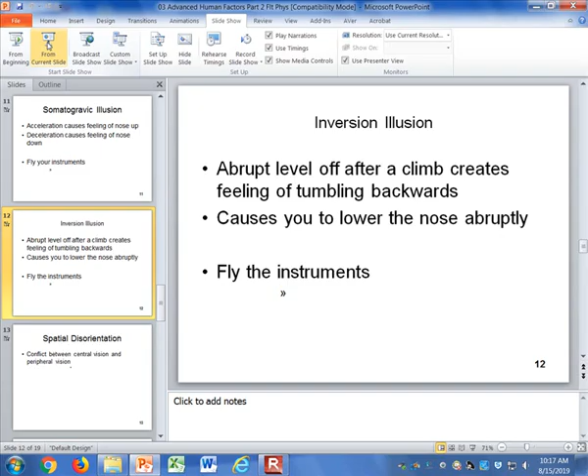Okay, inversion illusion. I think we talked about it yesterday, but what the heck. If you're climbing and you level off really hard and fast, it can make you feel like you're tumbling backwards, and that makes you want to push the nose forward abruptly.

The best way to counteract this is to make smooth and slow level offs. It's probably better to overshoot by 50 or 100 feet and go smoothly than to go wham. If you're saying wham in your head when flying on instruments, you're going to end up going wham against a rock.

So what do you do if you have weird feelings like this? Fly the instruments. And to be clear, although that's the right answer, sometimes it's not so easy. What I hope is that you get so used to your instrument scan, doing it over and over again, that it just becomes the norm.

You do what the instruments tell you, and we practice figuring out if one of the instruments is telling you something wrong, so you can stop paying attention to it and use the other instruments. You do that over and over and over again.

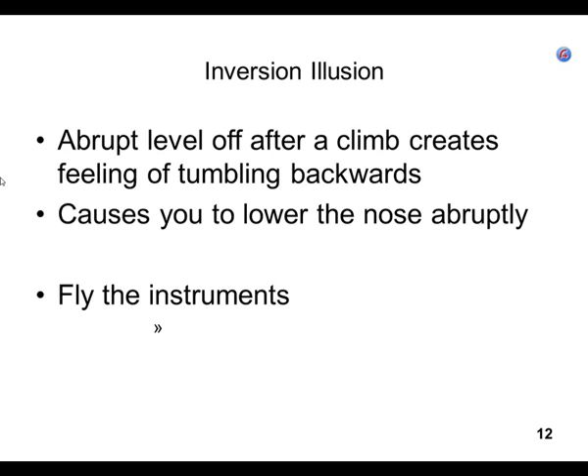Okay, spatial disorientation. I have done this. I was stopped, I think in a multi-lane, and we were all stopped, and the car to the side of me started moving forward, and I felt like my car was in reverse. Has anybody ever had that happen?

I intentionally do that to people. Parked right there, somebody parks next to me, I wait till right when they stop and start to back up. It freaks them out. I just like to look over and see the reaction — because I slam on the brakes, my foot's already on the brake, so I lift it up and slam it again.

Oh my God. So the data straight in front of me, where my car is not moving and the objects are not moving, conflicts with my peripheral vision — I'm getting some data that I am moving.

I think you're a bad influence on the rest of the students, Matt.

All right, so what can increase the likelihood that you're going to get disoriented? What are the things that can increase the likelihood that you get disoriented?

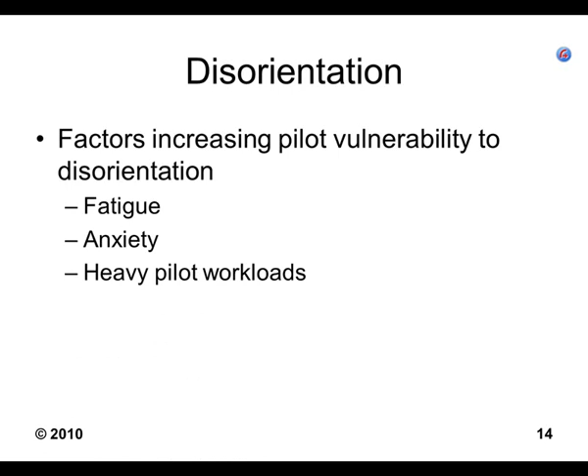When you're doing a heavy pilot workload, if you got behind the power curve, if your task management wasn't as good as it might have been, if you're a little behind and trying to catch up and do things in a hurry, and you've got more things to do than you can actually get done.

And the last two, hopefully reasonably preventable, are being under the influence of alcohol and/or prescription drugs. You've got to remember — what happens when you take prescription drugs and then go up to 5,000 or 8,000 feet?

Generally speaking, the side effects of that drug are compounded. So all the more reason why you need to be careful.

There's a great resource — call AOPA and say, hey, my doctor prescribed this to me, is it okay for me to go flying? And they can say no, and you can stop taking it. Depending on what you read, generally you have to have been off that drug for 6 to 24 hours, depending on what it is, before it's safe to go flying.

Of course, if you have an inner ear or sinus infection of some kind, man, don't go. Holy mackerel — if you're congested and can't pop your ears, it's going to apply pressure on your vestibular system. You're gonna get whacked.

So does anybody have any questions? These are the things that are going to increase the likelihood that you have some kind of disorientation problem.

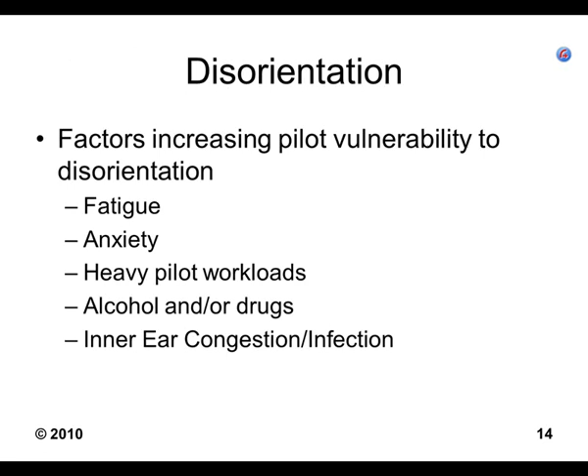So just so you know, with JFK Jr., guess which one was a factor? Fatigue. Yeah, he was flying at night, he'd already had a full day, and he went flying VFR when it was IMC.

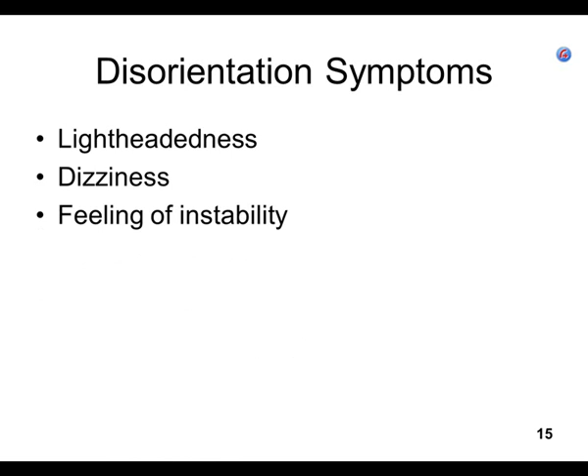Some other symptoms besides the one we've talked about: you might be a little bit lightheaded, dizzy, or nauseous. You might feel like you can't sit up straight, have a sensation of spinning, and just be flat out confused. It's like you're looking at the gauges and you cannot tell what you need to be doing.

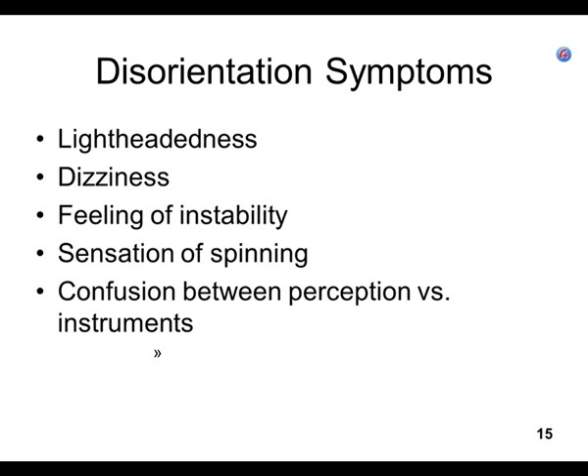If it gets to that point, the problem is, what do you got to do then? Fly the instruments.

So in general, if you want to prevent disorientation or get rid of any kind of disorientation, move your head less. That's one thing about cockpit organization. Get everything you're going to need for the flight on your lap and strap it down.

The first 4 airplane rides when I was in navigator school were in a little 2-seat trainer, and the 4th ride was an aerobatic ride. It was a T-37, and on the last ride we went upside down and yanked and cranked. They were trying to see if I would puke. They don't tell you that, but they call it a contact ride. I never did find out why they call it that, but it's an aerobatic ride.

You've got to make sure everything you've got is in a pocket and zipped or tied down. Literally, they told us to tie our pen or pencil on a string, so if we let go of it while writing, it wouldn't fall down and get into the ejection seat mechanism. Think about that for a second. You have a metal Cross pen, back then I had a chrome one, and if you dropped it and it got stuck in your ejection seat, you're generally not very happy.

So what would you have to do in flight? There's not really any room in that thing to crawl around. In your airplane, you don't want things rolling down and getting in the rudder pedals either. But if things fall down and you have to retrieve them, think about trying to retrieve a pencil or pen underneath your knees, closer to you than your toes. How far are you having to lean forward? How far is your head changing its normal plane?

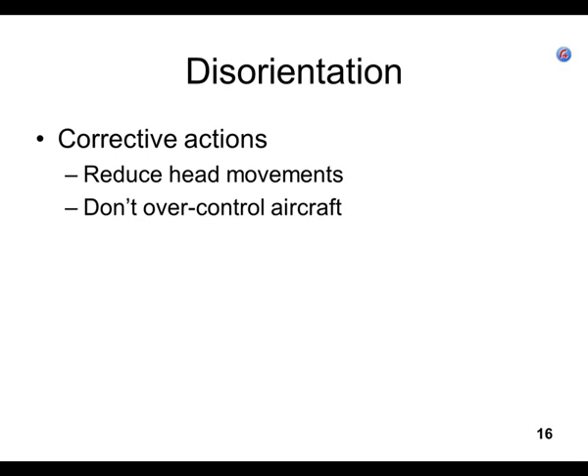So compared to what you're used to, it's really easy to over-control. Right now is the good time in the simulator to get into that habit pattern. And of course, we all know this one.

Motion sickness is commonly caused by vestibular disorientation. Like I mentioned yesterday, people driving cars never get car sick because what the car is doing to their body is close to what they're seeing out the window. It's when you're not looking out the window at the road that your likelihood of getting car sick goes up. The problem with IFR is you don't get to look out there and see what the road is doing.

The typical symptoms are nausea, sweating, dizziness, and if it's really bad, vomiting.

You know what they say about pilots? There's 3 kinds of pilots. Have I told you this story? There's those of us that have puked, those of us that will puke, and those of us that have puked and will puke again. That's the kind of pilots there are. There's only 3 kinds. Ask me to tell you a story after I turn the microphone off.

If you're in VMC, you need to be looking outside for traffic anyway. That's going to dramatically reduce the likelihood of motion sickness. If you're in IMC, all you got is the instruments. Don't be looking around, turning your head, gabbing to your passengers. You need to say, I need to focus on flying the airplane, we need to stop talking for about 10 minutes and fly the airplane. That way you're not accidentally turning your head sideways.

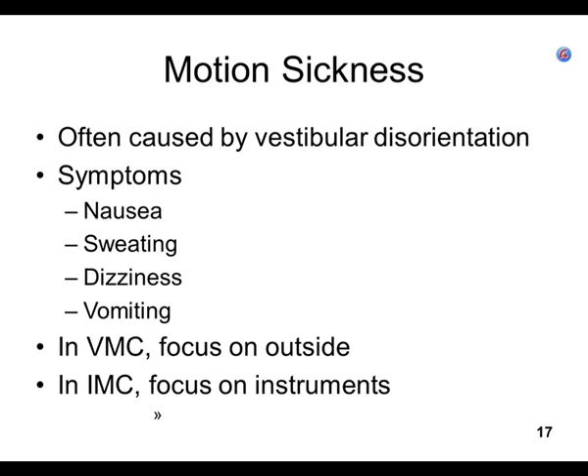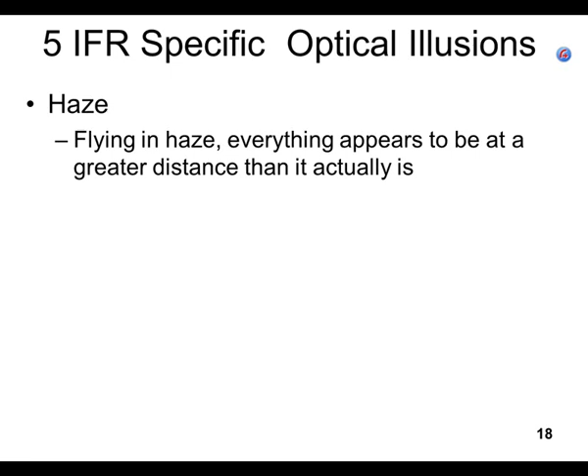There's 5 IFR optical illusions I think you need to pay attention to. These are review, but you're a lot more likely to hit these when flying IFR. If you fly in haze, your brain is used to seeing things out of focus as meaning they're farther away. So what's the big deal? Well, we're going to be breaking out of the clouds with rotten but legal visibility, and the runway's a little fuzzy. Guess what? We're going to think it's farther away than it really is.

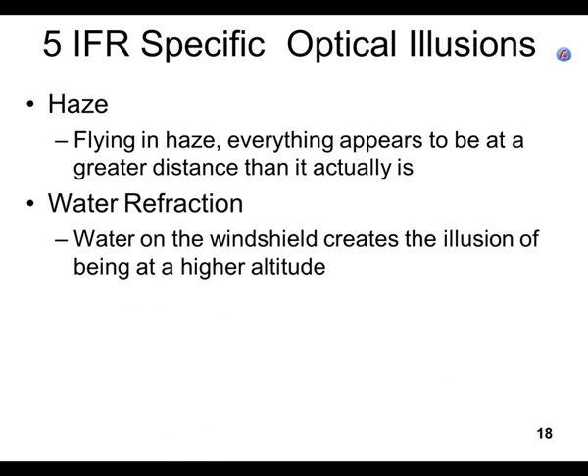Refraction of water - we're a lot more likely to be flying through rain if we're IFR, and it makes you think you're at a higher altitude than you are. You look down at the ground and it seems farther away because it's not as clear. And of course, we're going to be flying into and out of fog. Flying into fog tends to make you think that your nose is pitching up.

I remember the very first time I flew IMC ever. I was on a cross country with my very first instrument flight instructor. We were coming back from Bakersfield or Monterey to Fresno, and we had filed IFR. My instructor was current, so we flew IFR. It wasn't thunderstorms, but there was this big fat cloud, like 5,000 or 10,000 feet tall and miles wide, and the side was pretty much vertical - not thin and gradually thicker, just like VMC and then right into the cloud. We were flying straight towards it, and I felt like I was flying into a wall of cement 10,000 feet tall and 5 miles wide, and we just went for it. After we entered it, I was okay.

I personally have never flown in fog. Ground lighting - straight ground lights, like coming into Fresno Airport, Clovis Avenue, Shaw Avenue, stuff like that - things can look like runways. The good news about Fresno Airport is it's at close to a 45-degree angle to most of the main streets, which makes it easier to pick out the difference between it and the city streets.

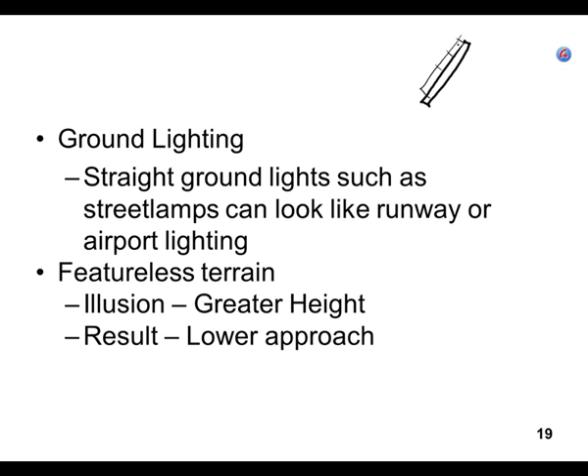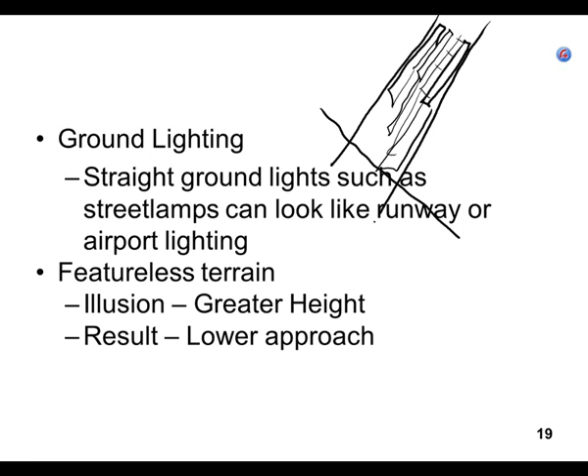At Fullerton Airport, let's see if I can do this - here was the runway, here was the taxiway, and here was the parking ramp, though it was a lot longer than that. Here's the taxiways, here's the parking ramp, here's the cars, and then there was a city street right here, and one right here, and another right there. It was at night, and everything was lit up.

So literally, I sort of made my own instrument approach. I flew to Seal Beach VOR, and then I was supposed to turn off of Seal Beach and fly outbound on a certain radial for like 8 minutes or whatever. So I hit the VOR, and I turned, and I called up Fullerton Tower.

I think they were with the equivalent of what's now Class Delta airspace. I'm starting my descent from cruise altitude, and they say report downwind. I was going to enter straight into the downwind. At 8 minutes I'm leveling off at traffic pattern altitude, and I can't find it. All of a sudden it's 9 minutes and I realize I went past it. Turns out I was the only one on frequency.

Fullerton Tower, 79122, I think I overflew the airport. I could tell when he replied he was trying not to chuckle, trying to be really nice about it. 'That's affirmative, 79122, you flew right past the airport,' and he gave me a heading to turn to. He was very nice about it. Of course in later years I realized he just sat there and watched me fly by. I'm sure if there were other airplanes and it was going to be a problem he'd have said more, but he just gave me a heading. I flew right past it, and the only reason I could find it is because he turned me around and gave me a heading straight towards it. For some reason I couldn't find the rotating beacon flying into it, but that first time when I turned around and came back, it was easier to see.

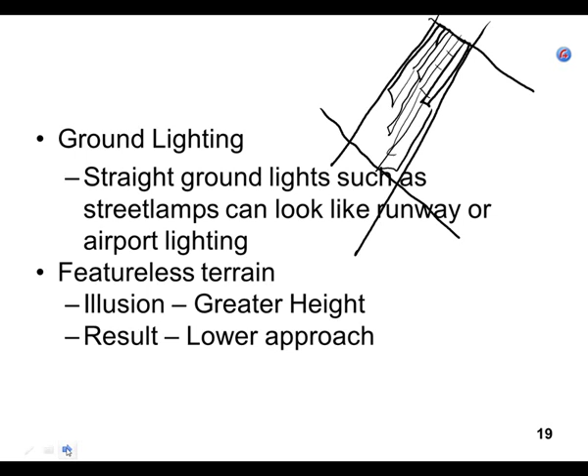All right, any questions about that? Okay.

Part 2. Before I get started on that, I'm going to pass out... I didn't pass out 4? Okay. Well, so here it is. Should have given that to you yesterday, huh? Some people.

You mean like this right there? You keep me straight, okay? Yeah, have a good time. I hope everything comes out all right. You never heard that one before? Okay, you don't have to laugh at that.

So the downside, I just barely got to FAA questions this morning. FAA questions, woohoo! I love FAA. Oh. Everybody likes FAA questions, right?

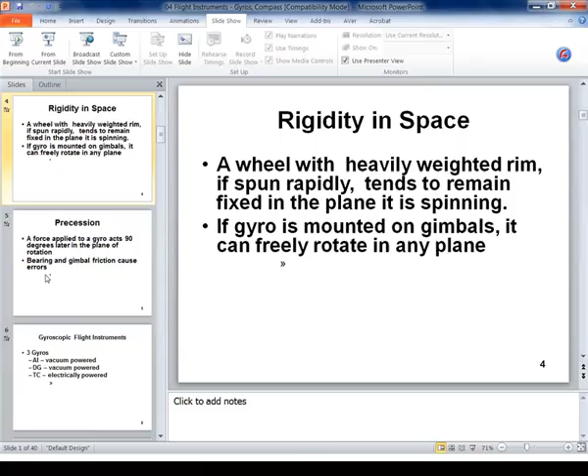All right, I want to draw a picture that I'm going to make you draw on the test. Interesting — I looked at the PA-28 Warrior 2 Pilot Operating Handbook, and it doesn't have a diagram of the vacuum system. And that's not the picture of it either. Oh, there it is. Huh? You will. Thou shalt.

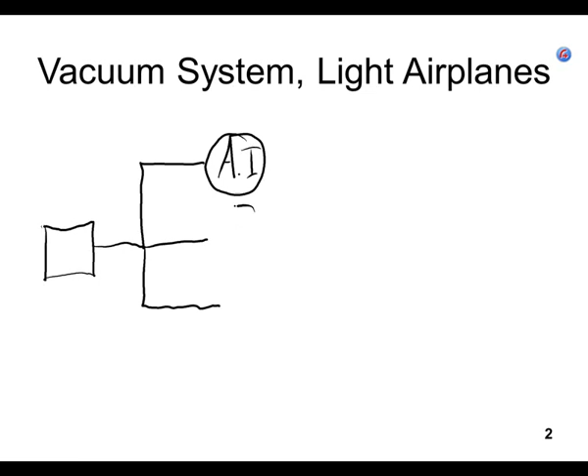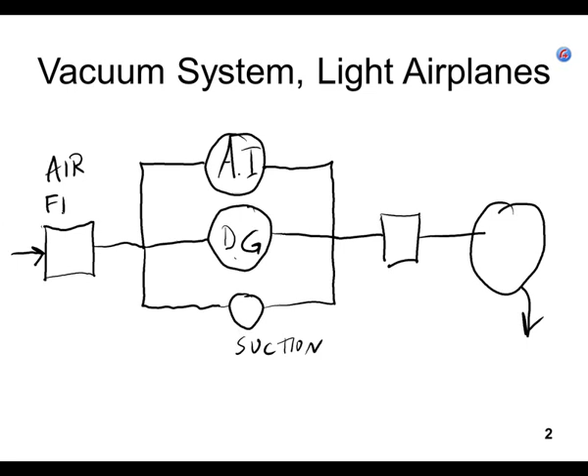So let's see how well I can do here. Attitude indicator, directional gyro, suction. Yes, vacuum has 2 U's in it.

You may recall from almost a year ago that I didn't make you have to draw, but I told you I'm going to give you a diagram. You know what, I'll do the same — I'm going to give you a diagram. I made you learn to be able to label 2 diagrams in Private Pilot Ground School 1: a basic electrical system, effectively, mostly — it was very accurate for small pipers, both a Tomahawk and a Warrior.

And a fuel system that was very accurate for low-wing airplanes. If I'm going to give you a Cessna, there's a couple of very slight differences on the electrical, and a couple of slight differences on the fuel system. But you're going to be taking your check ride in a Warrior, or for your private or commercial, you're going to do it in a low-wing Piper, so it worked out great.

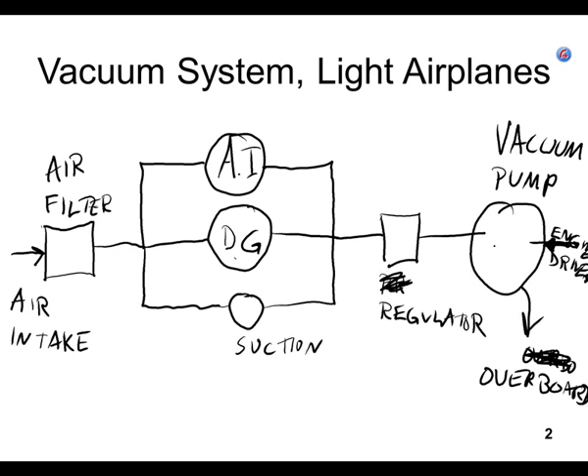So Mr. Asman had a good point the other day. I heard him talking about, if you can, during a pre-flight, reach in and try to rotate the magnetos, and if you could, you would be really unhappy. Well, you wouldn't be that unhappy. You'd be happy. You'd go, yeah, I figured it out before takeoff. Oh.

So this is what a vacuum pump looks like. Here's one right here. Let's see if we can find one on the back of this airplane engine.

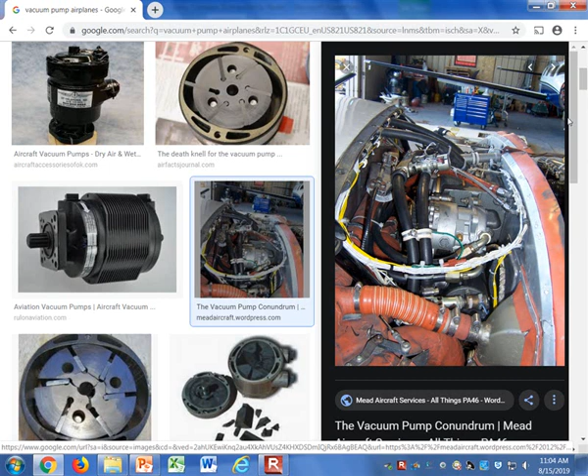This looks like an air conditioning compressor, and I can't see a vacuum pump on that one. All right, fine.

Here's a vacuum pump. You can see these vanes right there, made out of carbon. If it breaks and starts wearing out, that happens really fast, it could go bad. Yeah, look at this - it broke.

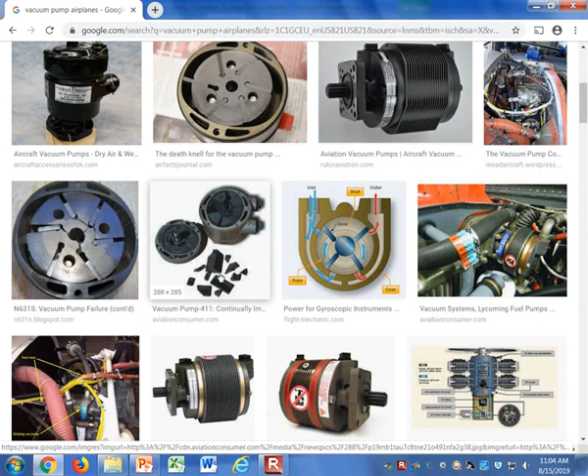Here you go, here's one. Here's a better picture. They don't all have cooling fins on them, although a lot of them have cooling fins. So here's this vacuum pump, and it's bolted into the back of the engine.

This is very common, some kind of a metal tube that turns, and then there's a rubber hose that goes back towards the firewall, back towards the instrument panel. And then somewhere on this thing is going to be a metal tube that comes out, usually an inch or two long, and air comes out.

The likelihood is this one can't rotate because it doesn't adjust like a magneto. So there's not a lot to look at and say, is it going to fail or is it about to fail? But next time you're doing a pre-flight, you could ask your instructor, which one of those things is the vacuum pump?

Like, here's one. Oh, okay, good, here's a vacuum pump. Where'd that thing go? There's an alternator, another alternator. Where'd that vacuum pump go?

So here's a vacuum pump. And this hose, remember, it's sucking air to the engine, so this is probably the regulator. All right, that's enough pictures.

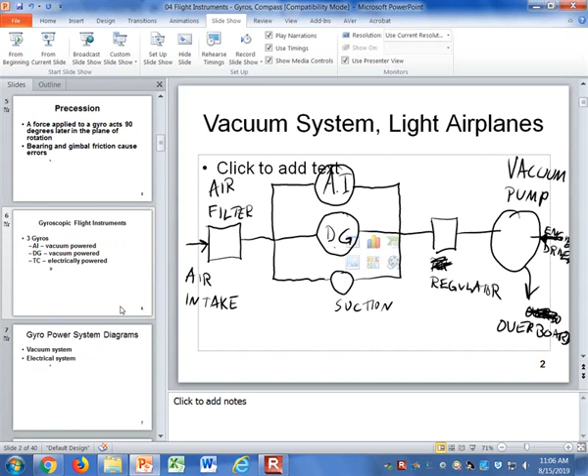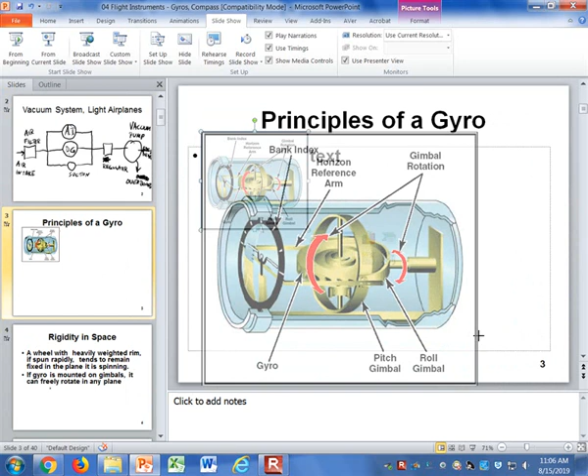Let's look at the construction of a gyro first. A gyro has a rotating wheel in it, and the wheel is made out of metal, so it has significant weight. When we spin this up to speed and it's spinning fast, it has a lot of inertia, a lot of momentum - that's part of what you need to have a gyro, is momentum or inertia.

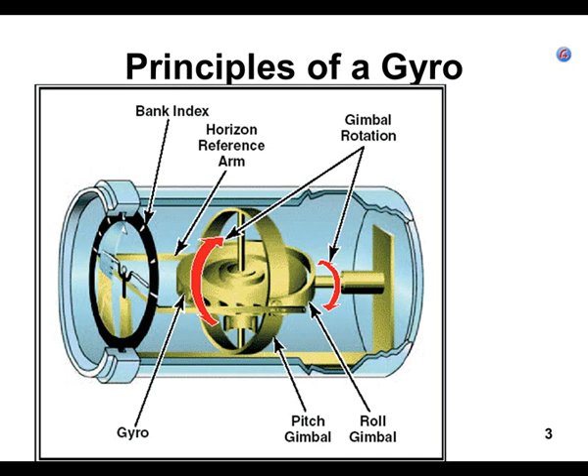So inside, that gyro stays stationary. And now the case around it, which is bolted to the airplane, is the part that tilts. So you're just looking at a different piece. When you fly that airplane and push the nose down, it makes it look like what's inside the attitude indicator is going up - you're just looking at it from a different angle. That part you're looking at is actually hooked up to the gyro. It's not moving because it has rigidity in space.

Speaking of rigidity in space, if you've got a wheel and it's heavy and you spin it rapidly enough, then it will try to stay fixed in the plane that it's rotating, in the plane that it's spinning. I think that's really close to verbatim out of the Jeppesen right there - I found an old slide I had made up. It's like, yeah, okay.

So this rigidity in space applies to all gyro instruments. But you'll notice it says it's got to be spun up and spin rapidly, so that's why we need the vacuum system, to suck air across the vanes on that gyro so it stays spinning. And if you mount it on gimbals - gimbals is just what it's bolted to - if it's mounted on gimbals and it can rotate in relation to the case, the box it's installed in, then whenever the airplane pitches or rolls, the gyro can stay rigid in space while the airplane moves.

And now you're looking at the gyro indication from a different angle - looking down or looking up or tilted to the left or tilted to the right. So in airplane gyros, we're always going to have at least one gimbal so that the gyro can stay rigid in space and we can just look at it from a different angle.

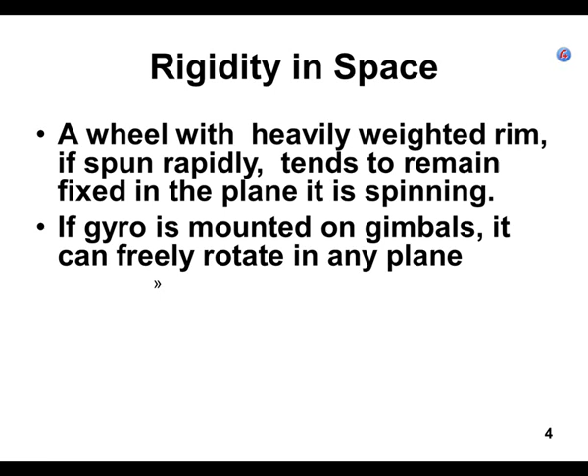So now we're going to talk about precession. And we're not talking about a ceremony where we all get in uniform and march. Okay, fine.

If you have a gyro and you try to push it, the effective force occurs 90 degrees later towards the direction it's rotating. So that's one of those weird things about gyros. That's actually one reason why it's easier to ride, or rigidity in space.

That's why it's easier to ride bicycles and motorcycles when you're moving, because the wheels act as gyros. Ever notice on a bicycle it's harder to stay balanced the slower you go? In fact, when you get to zero, it makes it really hard to balance. Not that you can't, but it's hard. The faster you go, the more they act as gyros, and the wheel wants to stay rigid in its plane of rotation.

If you act on a gyro, if you push on a gyro, it's going to act like you actually pushed it 90 degrees later, along the plane of rotation. So if we push on a gyro because we do something to it, it's going to impact it, and we're going to get to that.

The other thing is the bearing that it spins on, and if the gimbals have a little friction and the bearing has a little friction, then it won't spin as fast as it's supposed to, so it won't be as rigid in space as we'd like it to be.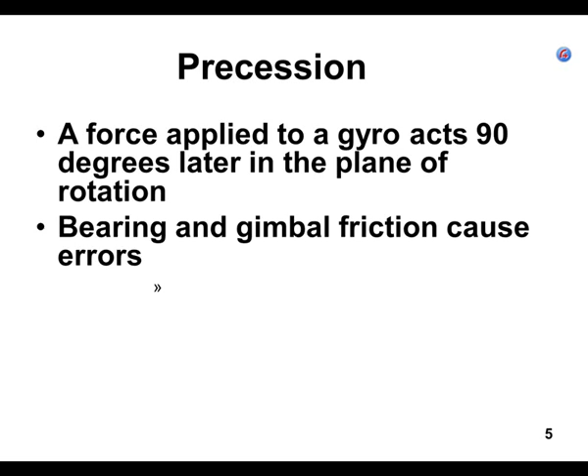Of course, we already know that there are 3 gyroscopic flight instruments in small aircraft. The attitude indicator - on a test, if I ask what are the 3 and you write capital A, capital I, I will accept that answer. If you put directional gyro or heading indicator, DG or HI, I would accept that as a complete answer. And if you put turn coordinator, or wrote capital T, capital C, I would accept that as a complete answer. I might also ask, and I can almost guarantee this is how I'd write the test question: what are the 3 gyros in small airplanes flying IFR, and what powers each of them?

But hey, this is just a review from last semester, maybe even from some place earlier this week.

Which brings up a really good point, that I just thought of.